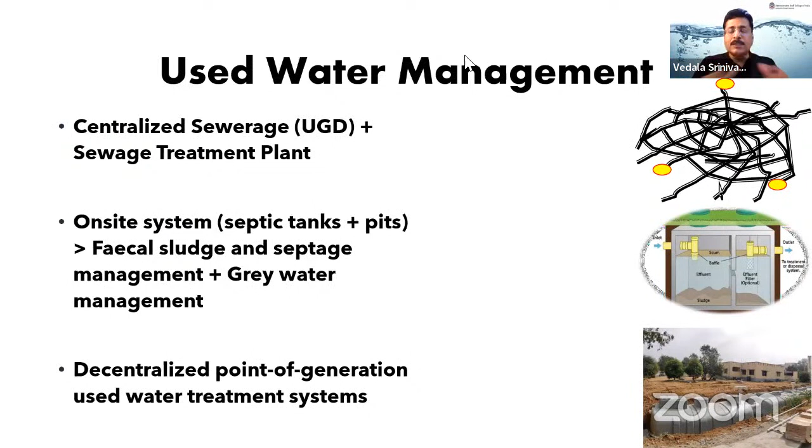Now, this particular third option, we don't have a clear understanding. We don't know actually how many units are there. We don't have a database, effective database. It is often falls between cracks. Nobody regulates them. And many a times they are symbolic in nature. So to answer your question, how many decentralized projects are available?

The estimations are in the range of 25,000 installations in our country. 25,000 installations and above are available in our country with an installed capacity of 8,000 to 10,000 MLD. So it means this is a phenomenal quantity of asset that has been created, but often underutilized or unregulated. And there's no standardization of technology, no standardization of operation and maintenance, no standardization in terms of monitoring systems.

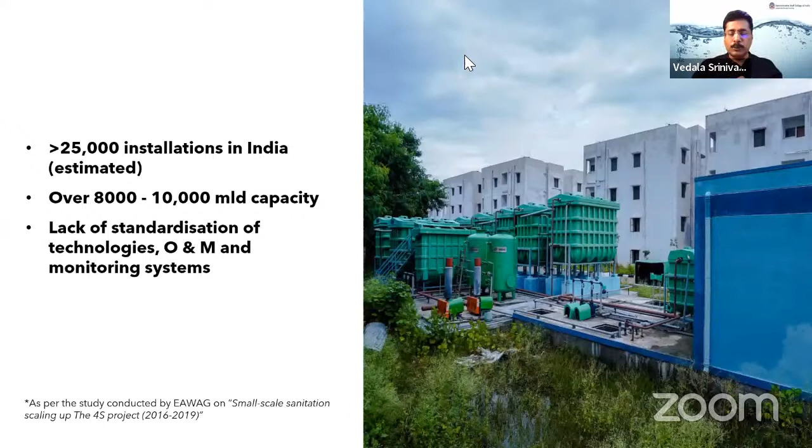So today's discussion is all about how do we get it? How do we strengthen this? How do we leverage this 8,000 to 10,000 MLD capacity to protect water bodies, to protect public health?

Now, as all of us know, this sort of proliferation of decentralized STPs happened because of triggered by environmental impact assessment notification under the EP Act. Now, these private STPs are typically limited sewer systems within a small geography. It could be a gated community or it could be an apartment with a decentralized STP. As I said, it could be a high-rise building, commercial, hospital, hotels.

Now, because of the national regulation, many states have introduced state-level regulations as part of either the Pollution Control Board or urban development departments. Now, there are also voluntary efforts because many apartment blocks are of the opinion that if they install this, the impact on the downstream will be less.

There'll be less NIMBY, not in my backyard. And also some of them, because of the water stress, use this water for recycling purposes. So there are multiple reasons why this whole decentralized private STP sector has proliferated in our country. And as I said, the regulatory trigger was a major trigger under the EP Act.

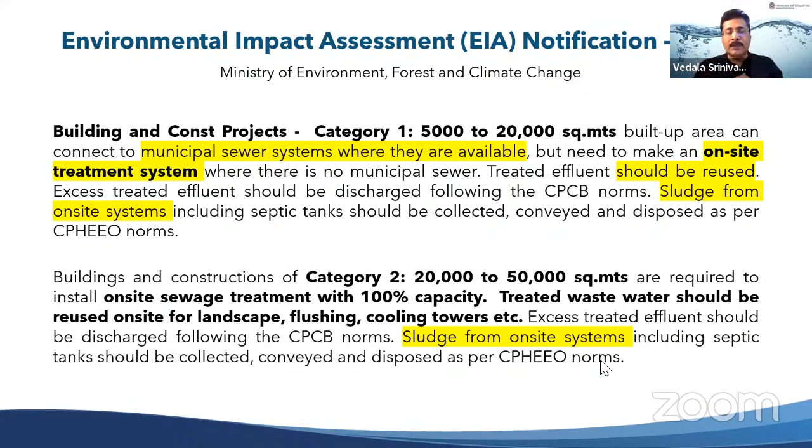As you know, there are three categories: category 1, category 2 and category 3 buildings. Category 1 buildings, in the range of 5,000 to 20,000 square meter built-up area, require an on-site system if there is no sewer system in place. Category 2 buildings, in the range of 20,000 to 50,000, require an on-site system for 100% capacity, and they need to recycle it significantly for cooling tower applications, flushing applications, and then excess water can be flushed out.

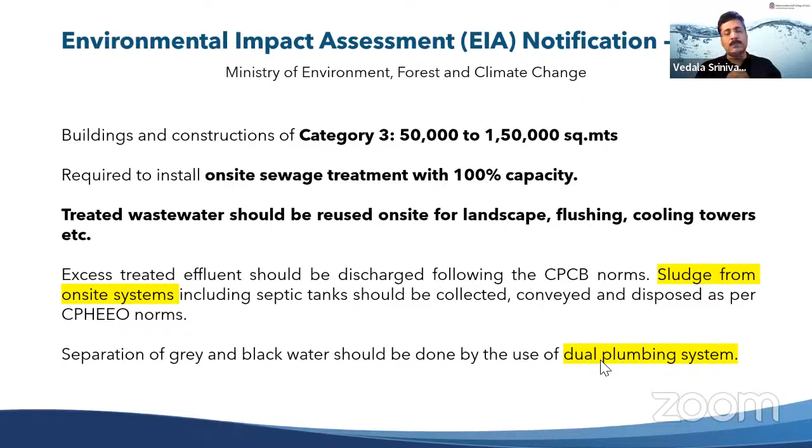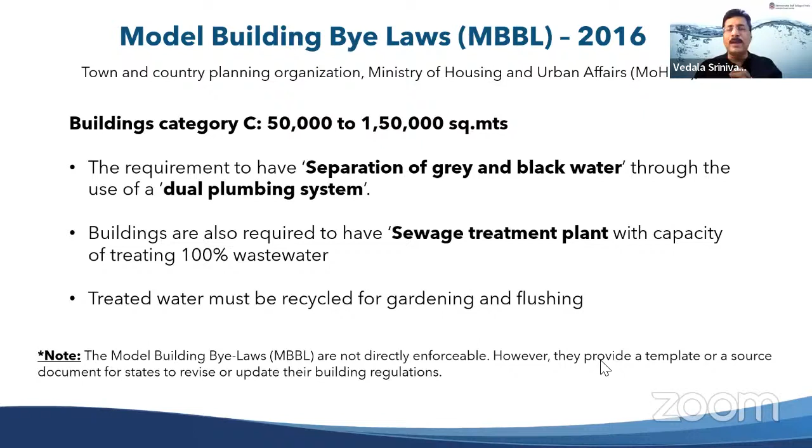Category 3 buildings are pretty important, where a dual piping system is mandatory. They have to use it substantially. And even if there is a nearby sewer system, it is mandatory that they have an on-site system. So these regulations are in place. The Model Municipal Act, model building approval or building regulatory system also mandates on-site systems. Because of all these reasons, you have a phenomenal proliferation of decentralized STPs, which we don't know much about, which we don't regulate, or we underutilize them.

Now, what is the scenario on the ground? There are very few studies carried out. Eawag is one very credible study. ASCI also did some studies in this space. First of all, no entity, neither CPCB nor the state pollution control boards, maintains this data. They are mostly unregulated. Consent to establish is taken, but consent for operation is often not taken. No design standards. In fact, in government systems, we follow L1.

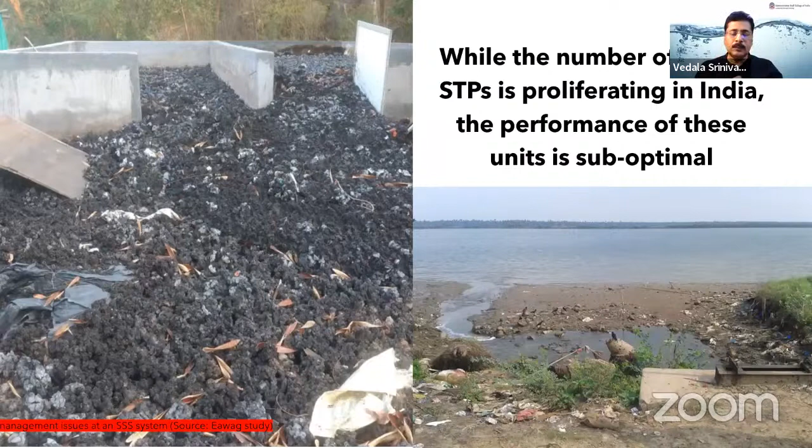There is also an absence of market for treated water. A few startups have come forward to buy this water, but the market is not created. Because of that, there is a complete failure of this fabulous sector with 8,000 MLD capacity in the country, often underutilized. So today the conversation is, how do we strengthen the performance of these private STPs, which have proliferated in our country but operate at a suboptimal level? That's the conversation we're going to have, and we're going to carry out a number of studies as a follow-up to this webinar.

Some of the questions we should collectively answer are: who should collect the data? How do we strengthen the regulatory mechanisms? Which agency should be accountable, the environment agency or the city governments? Who should monitor it? How do we set design standards so that useless STPs do not get implemented? How do we notify recycling standards? Unfortunately, India doesn't have recycling standards, even though we are talking about dual piping systems. How about performance monitoring and third-party audit?

And how do we create a good market for used water treatment so that treated water could be monetized, creating an incentive for builders to perform well? And how do we incentivize building associations to comply with the standards and recycle the used water? These are generic questions we may have to address to strengthen this ecosystem of decentralized used water management. As I said, it is equivalent to 20,000 crore investment on the ground, often underutilized, and a collective effort is required to revive these assets and protect the water bodies downstream.

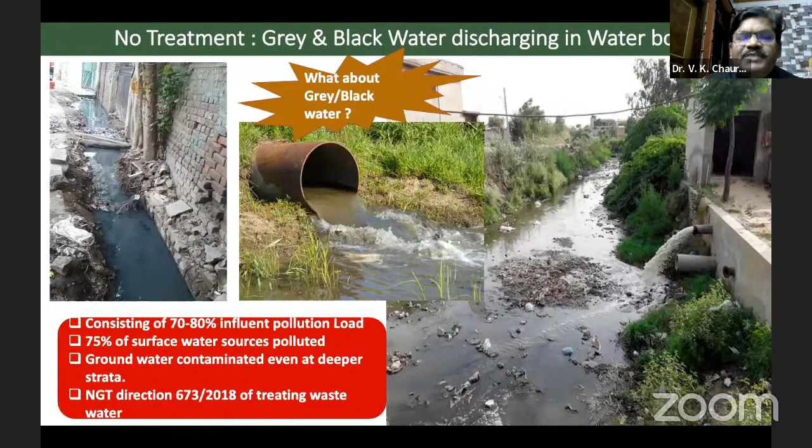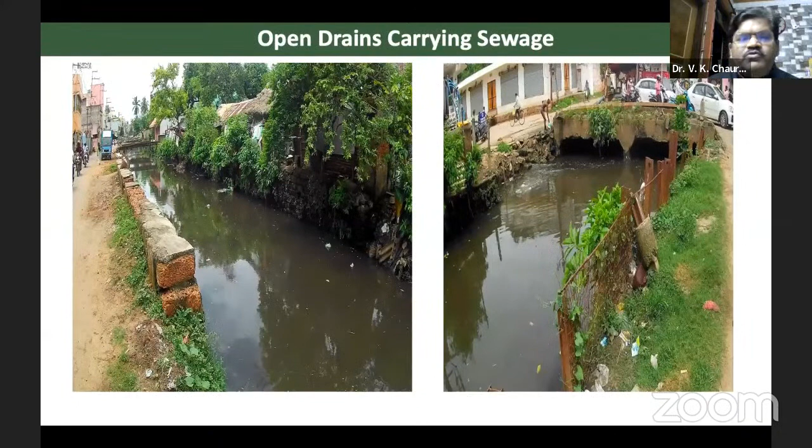Yeah, these are some of the photographs of what the scenario is in the towns. So these things prompted that used water has to be holistically treated. Next, please. Yeah, and apart from used water, even fecal sludge also, because 60% of our population is dependent on that. So this used water and fecal sludge, properly desludging wherever needed, being brought to a designated place and treated was also a challenge. So that also we are handling.

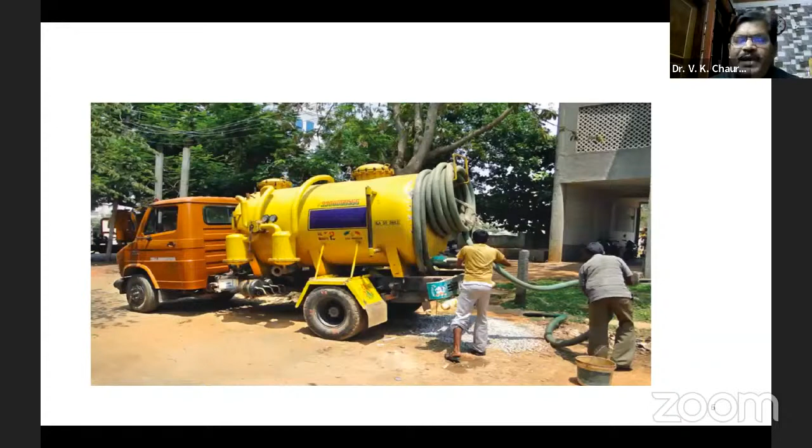Next, please. Yeah, so if you see used water management broadly, it can be categorized in two ways. One is the off-site sanitation system, a network-based system, whether centralized or decentralized, and another is the on-site sanitation system, where locally it may be a septic tank or some individual unit installed in the houses, for example, like Johkasou and similar things.

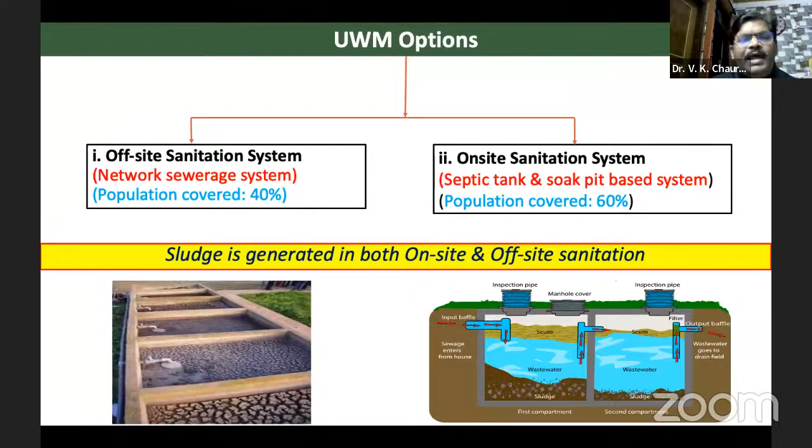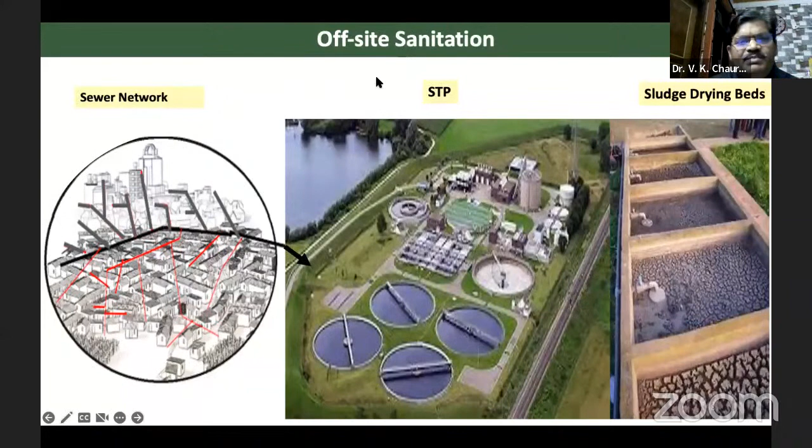So these two sorts of things are there, and in both treatment processes sludge is generated that also needs to be handled, and sludge is not only generated in the process, but routinely also when we do O&M, sludge and other things come. Next, please. So this is just to set a context that it is similar to the off-site sanitation system. It may be centralized or decentralized. Next.

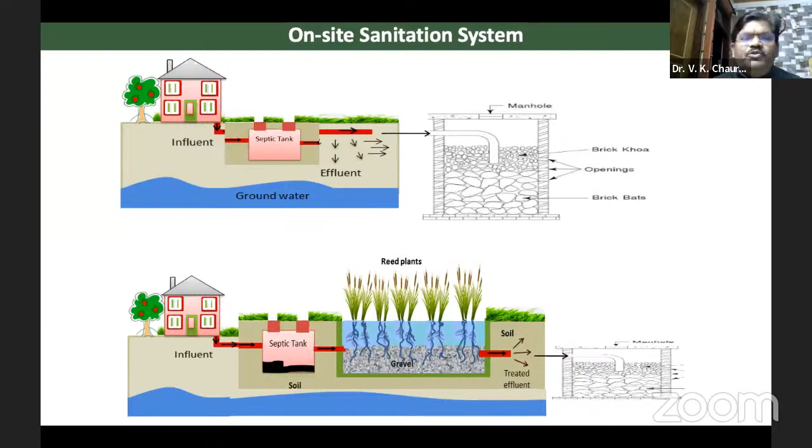Yeah, this should be the on-site sanitation system, but often it ends up that only a septic tank is there. Often the soak pit is absent, and even if a soak pit is there, it is not properly maintained, and the effluent from the septic tank comes to, let us say, the drain, or it is lying in the open. So that is a cause of pollution and environmental degradation. Go to the next one, please.

Yeah, so apart from that, fecal sludge is also conveyed and treated through the FSSM system. In many cases this is being done as a standalone treatment facility, but there is ample opportunity and feasibility that it can be co-treated, which will not only save cost, resources and effort, but it can be treated in the same facility at no cost, and those STPs we are supporting under Swachh Bharat Mission. So these efforts will address not only the used water problem but the sludge problem also, which requires occasional desludging based on need in septic tanks.

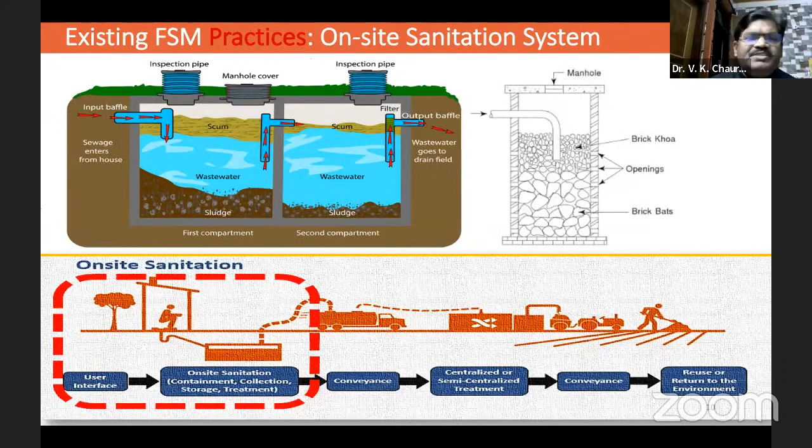Next, please. Yeah, so I was mentioning the main problem, the actual scenario in the towns which are not having a sewerage system. If you see, two things are very important. The source of pollution comes from the toilet, what people often call black water, which carries, let us say, 30 to 40% or sometimes 50% of the BOD load, and the wash basin, bath and kitchen also carry 50 to 60% of the BOD load. All these go into the drain where a sewer network is not there, and over and above this, the effluent from the septic tank also goes.

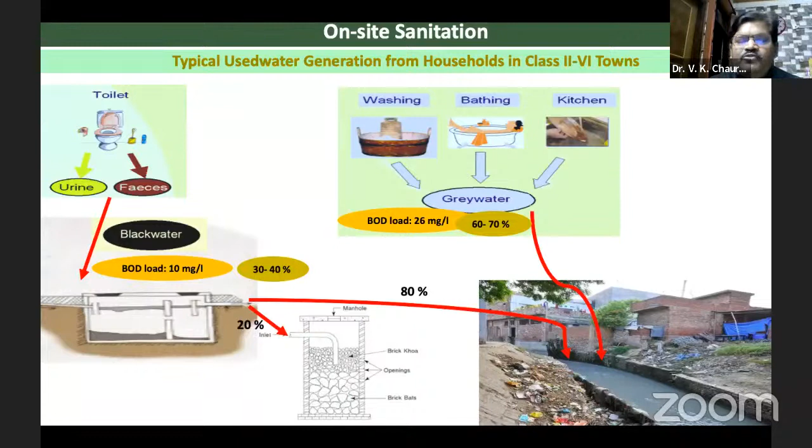So around 80 to 85% of the pollution is already going out apart from what is being treated in the septic tank, and sludge, which is sometimes taken out, is important for its functioning, but its contribution to the overall pollution generated is very minuscule. So this prompts us that used water should not be left without proper collection, treatment, and of course beneficial recycling and reuse. Next, please.

So the approach that we are following under Swachh Bharat Mission is, ideally, individual households should be connected with a sewer network. After that, it should come to some centralized or decentralized treatment plant, and then it can be used either for flushing and gardening, or for industry, or for agriculture. That is the ideal thing, and not only ideal, most developed countries are following it. So this is the most desired option.

But to reach that requires a lot of capacity, resources, and time, and doing it in one go sometimes becomes a challenge, seeing the capacity of our ULBs and their ability to operate and maintain. So keeping all these things in mind, for towns with less than 1 lakh population, we are suggesting to go in an incremental manner. Wherever funds are not available, used water can be handled through interception and diversion. The drains you saw earlier can be intercepted and treated with robust technology where less skill and less O&M is required.

And of course, for towns and cities with a population of, let us say, more than 30,000 or 50,000, for their sewer network we are recommending that, to begin with, they plan on a whole city basis and start implementing from a core area or selected ward that is suitable for the ULB. The advantage is that once this planning is done in one go, it can be implemented in parts based on availability of funds.

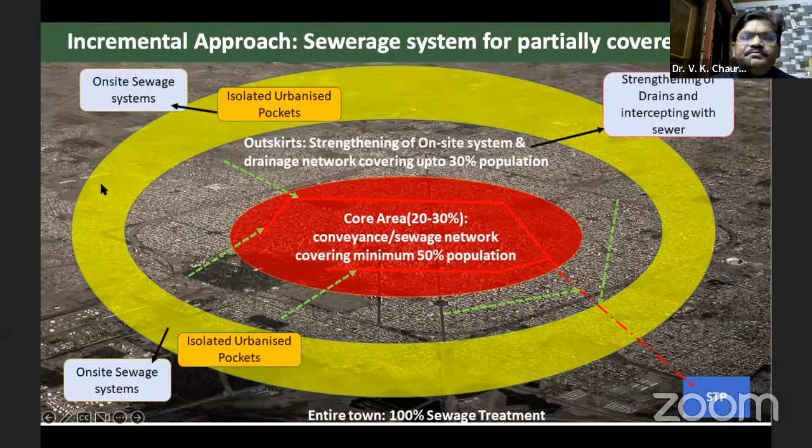Next, please. Yeah, if we see in this approach, the immediate financial requirement becomes almost half. In the conventional system, where many states like Gujarat, Haryana, Punjab, and now Maharashtra are planning, they are covering each and every individual household in the ULB. That conventional approach will cost something like 8,000 to 9,000 per capita, but if we go the incremental way, it will be 4,000 or so. So it becomes more affordable for different classes of population. Next, please.

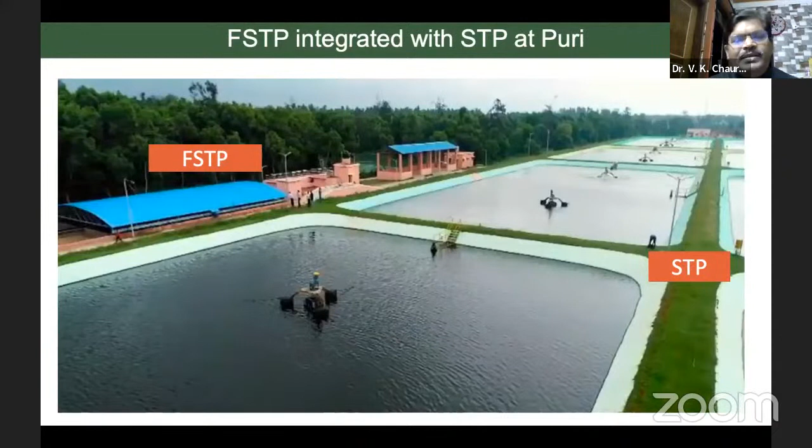And regarding fecal sludge, as I mentioned, where STPs are available, it can be co-treated without any other facility. That can be done immediately, whether through a solid liquid separator, or, as I will show in the next slide, it can be put in directly, because the quantity of fecal sludge is only 2,000 to 3,000 liters in KLD, but the incoming flow is often in MLD, million liters, more than 1,000 times. So even if the concentration is 2, 3, 4 times more than sewage, it will have minuscule impact, especially in smaller towns.

So this is one thing we are suggesting: in the entire planning, if systems are not planned economically, later on operation, maintenance and other things become difficult, things will not be properly operated, and the system will be bypassed if electricity bills are not paid, and the objective for which we have created it will not be fulfilled.

So one thing is very important in planning: depending on resources, ULB capacity, and local requirement, things should be planned in such a way. It may not be 100% as per norms, but it can give, let us say, 80-85% results, while being sustainable, and people can afford and maintain it. This is the need of the hour. Next, please.

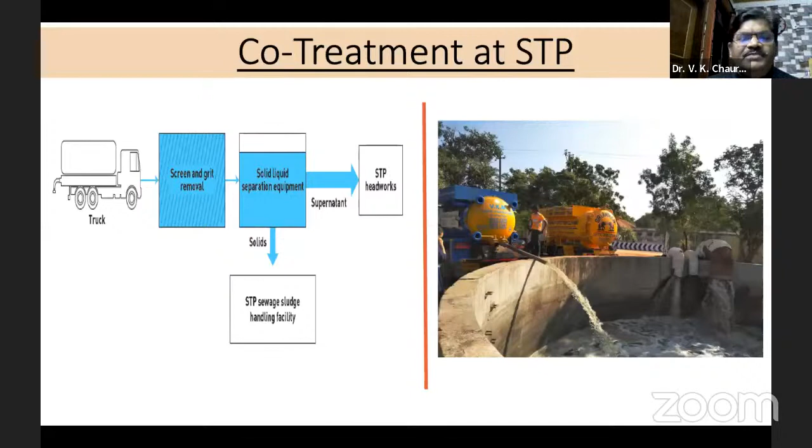We are going to issue an advisory that desludging, which earlier used to be done on an annual, periodic scheduled basis, was putting a lot of pressure on the ULB and people, and they were doing it compulsorily to get good marks in Swachh Sarvekshan. We are relaxing that and telling them they can go for need-based desludging, which will further optimize cost. And even where there is no treatment plant or other system, a sludge drying bed alone will be able to handle it, because the sludge coming from septic tanks is digested.

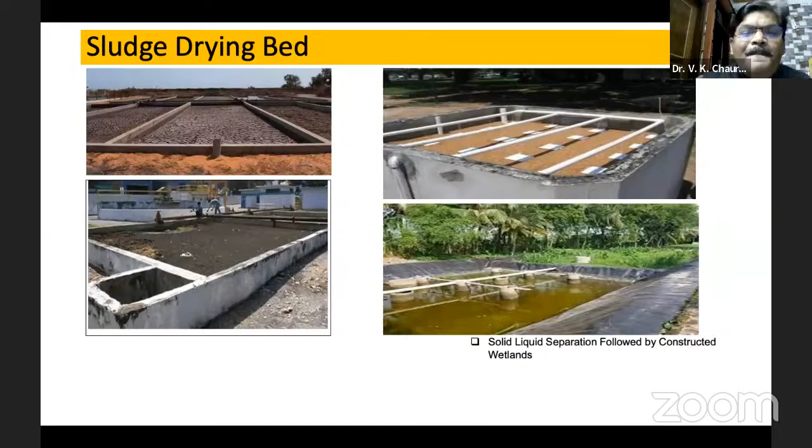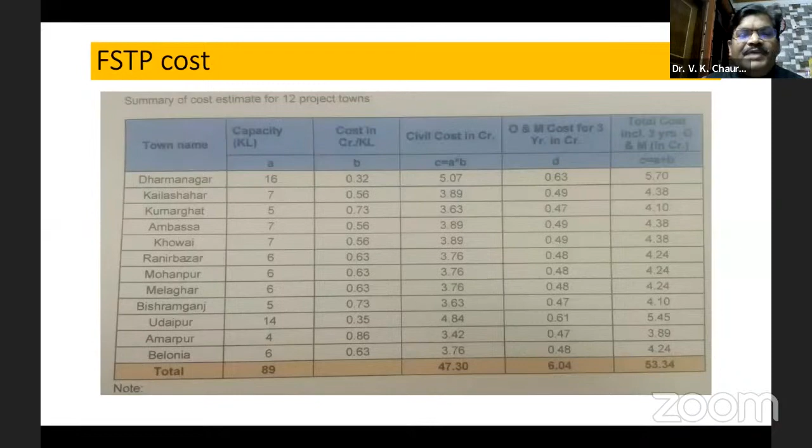Next, please. Yes, these regulatory requirements I am coming to. This is important, where the Honorable Supreme Court or NGT is also monitoring. So if used water is not handled properly, a lot of financial penalties and other things are coming, which should be avoided, and that's why advance planning should be made.

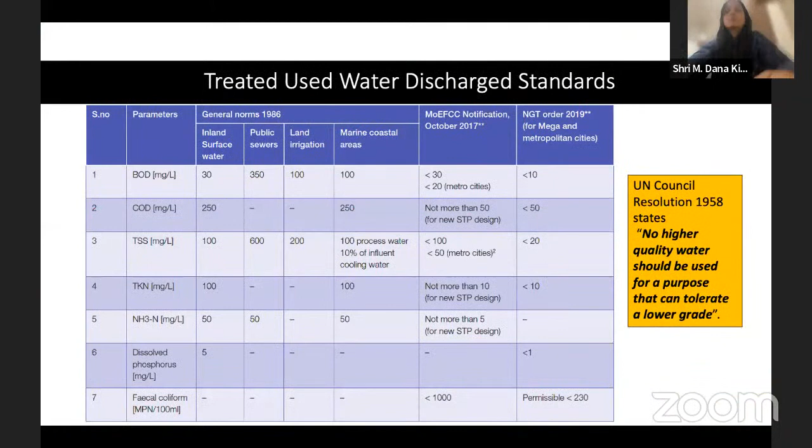Next, please. Yes, here pollution control boards' cooperation becomes very important; the standards should be based on requirement. As the UN Council mentions, no higher quality water should be used for a purpose that can tolerate a lower grade.

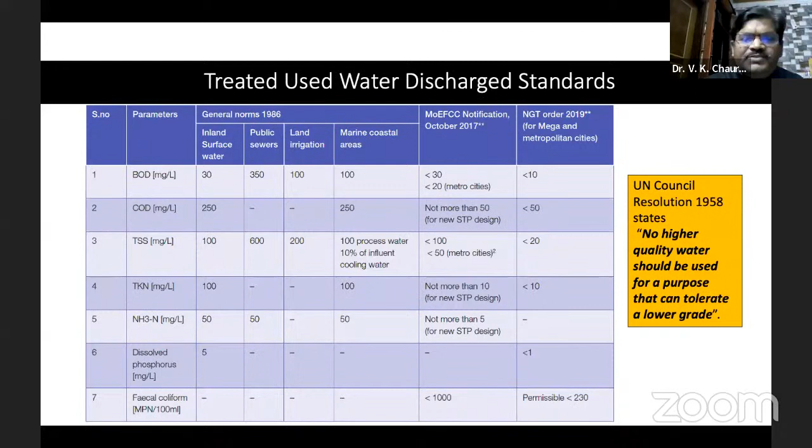Now, I think you have beautifully outlined the vision under the Swachh Bharat Mission for dealing with used water management. And you have also indicated that about 1,300 MLD of used water or wastewater treatment capacity would be envisaged as part of SBM 2.0.

Can you hear me, or is there any problem with the voice? No, it is fine. It is audible, sir. It's clear.

So the point I would like to amplify, and probably request Dhanakishore sir to come in: while the national government is looking at used water management from a city government's perspective, a large capacity is built parallelly, maybe much more than 1,300 MLD, without our oversight, without our regulations, without our investment. The best part is it's not public sector investment, it's private sector investment. Now, how do we amplify that? How do we control it?